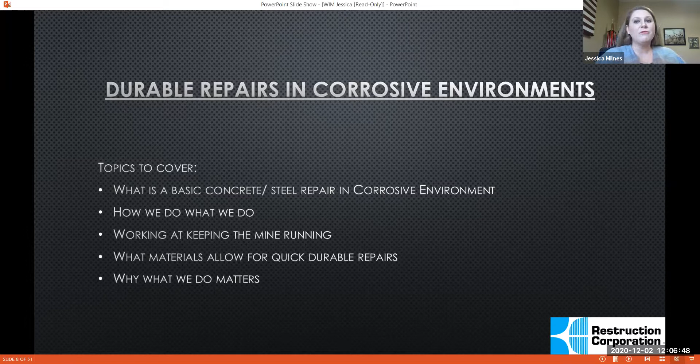So some of the topics that I'm going to cover today are what is a basic concrete repair or steel repair in a corrosive environment, how we do what we do, working at keeping a mine or another structure up and running while we are actually doing the work, and then what materials allow for these type of repairs, and then why what we do matters.

So let's look at a couple of projects that we've actually done. So this is a sulfuric acid tank house in Arizona. And what is happening here is the acid is leaking down from their SX/EW, from their processing. And it is corroding the coating, and then it got into the concrete. And once the acid gets into the concrete, it can get into the ground. So we want to protect not only the structure, but the ground and anything that's underneath it.

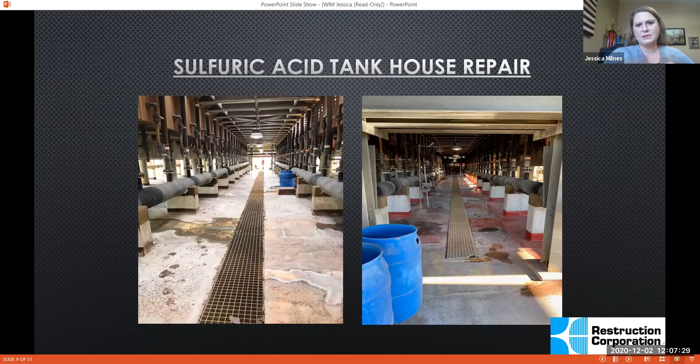So these are kind of some before and afters of our repair. So what you can see here is when this acid gets on the coating and there is any kind of failure in the coating, it gets underneath it and it causes this bubbling. So what's actually happening is the coating itself is coming apart from the concrete, but the concrete is also disintegrating. So it is falling apart.

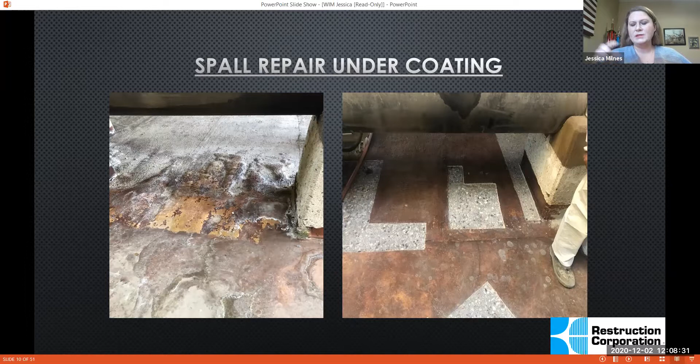So what we do is we go in and we remove the coating and we take out any of the bad concrete. And then we want to use really, really sharp edges, squares, anything like that. We don't just lob it. And the reason behind that is in a durable repair like this, we want to have good exposed sides so that the new material that we put in is going to bond well and have a cohesive coating at the end.

So the next step, after we've removed the coating and taken out any of the concrete that is delaminated or disintegrated in some way, shape, or form, we put down new concrete, and you can see the sharp edges. The goal here is not to remove and replace everything. The goal is to actually only remove and replace what is delaminated or what is no good. So that is why it's patchy as opposed to just removing the entire floor. And we'll kind of cover why we do some of that. Then we come back in with a coating over the top of it.

So a mention on this concrete is this is not the concrete that you see in a ready mix truck when you're cruising down the road. This concrete is very, very specific to this environment. The reason we use specific concretes in environments like this is, number one, the mine isn't going to shut down for us. They're not going to stop running so that we can go in there and take 28 days for standard ready mix to cure before we go in and coat it. So this specific concrete that is poured here is 98% sulfuric acid resistant. So it's not 100%, but it also has a really fast cure time.

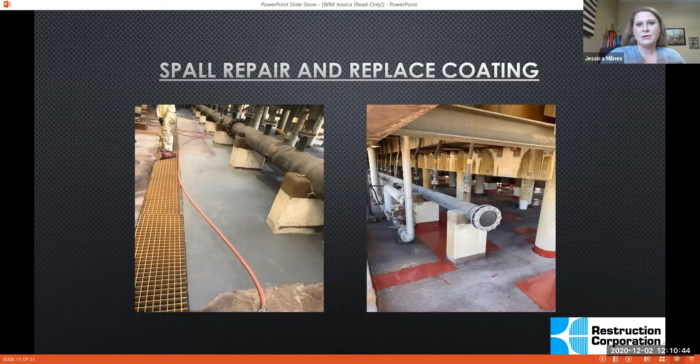So we're not sitting and waiting 28 plus days in order to go and cover over this concrete to protect it. It immediately begins to harden, it has a fast cure time, and we're able to go over it really quickly, protecting it even further. The other good part about a concrete like this, as opposed to using a ready mix in an environment like this, is if there is a failure in the coating, this concrete itself is sulfuric acid resistant, meaning it's going to help keep the acid from getting into the ground or into whatever substrate is underneath it.

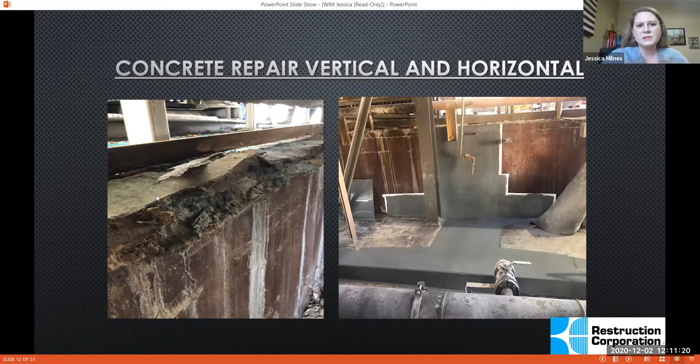Here's some good examples of what we geek out about, I guess is what you call it, is the delaminated concrete that is just literally crumbling and falling apart because of where the acid is getting into the concrete. And then you see this repair material is also a good repair material for vertical or overhead. So we are able to use the same concrete on the flat surface as we are on the vertical surfaces. So that is also something special about it.

Here's a beam. So the acid kind of drips down and it sits on this beam, and the machines are above it and they're being supported by that beam that is sitting on this column. So what is crazy is that you look at it and you think it's steel. It's not actually steel. That is fiberglass that they're using that isn't as susceptible to that corrosive environment. So we were able to just chip this out and replace it. And what you can see here is that it just goes back to what it originally was. It's not some new design. We are just removing and replacing what is bad.

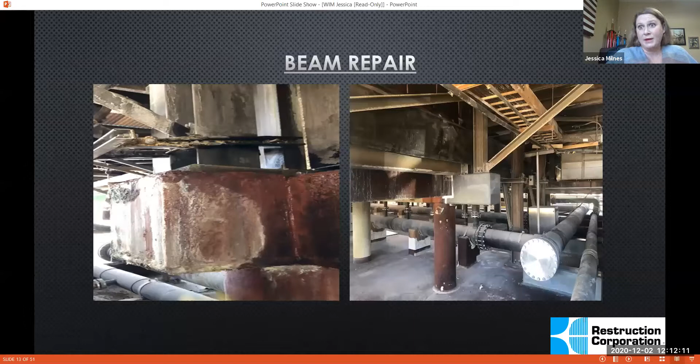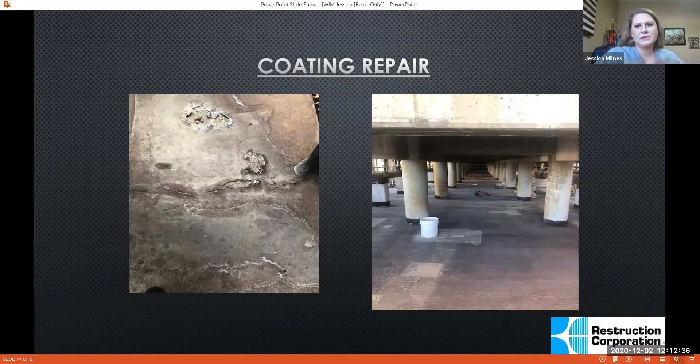So here's an up close of that coating. And what we're showing here is that sometimes if we catch it early enough, and we were able to widespread across here, catch a lot of it early enough where the concrete wasn't bad underneath, it's basically just removing the coating and replacing the coating. So that's kind of what we did there. And then here's a big overview of how you can see that we just removed the bad spots, and it's a mining environment, so no one actually really cares that much how beautiful it is when we're done.

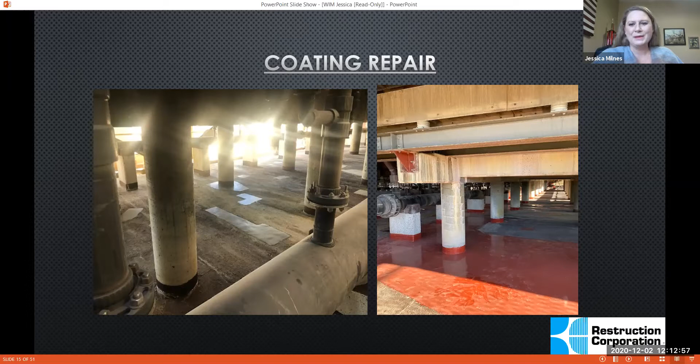But I still think the straight line stuff, they're pretty. So here's an example of some of those chemicals. If you have questions about them, or you want to know why we use what we use, or in what other environments, just get a hold of me and I can let you know what any of these repair materials are. So the Eucorepair is the one we were talking about.

That's the quick setting, low shrinkage. So I didn't even talk about why it's important. When you pour concrete originally, it shrinks. So when we go in and repair, we can't pour a concrete material that is going to shrink. Otherwise, it would be smaller than the patch itself. So we use specific materials that don't shrink in order to have it stay within the perimeters of where we've poured that repair back.

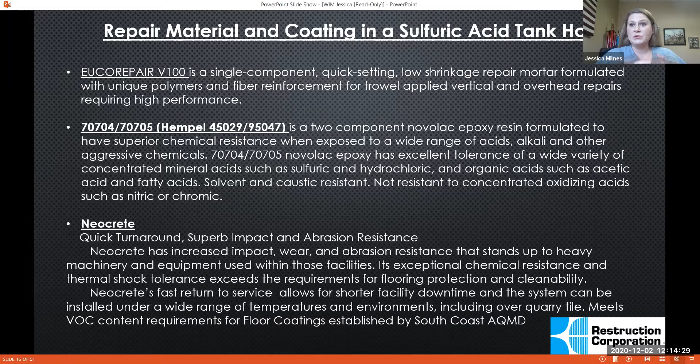Then we used a Hempel product. It's a 2-part component, a Novolac epoxy resin. And then we used a Neocrete, which has, and I took this off of them exactly, superb impact and abrasion resistance. That is important in high traffic environments or really rough environments like a mine, that we choose a coating and a material that will not only stand up to the acids and the corrosion, but will stand up to the abuse that it is actually going to take.

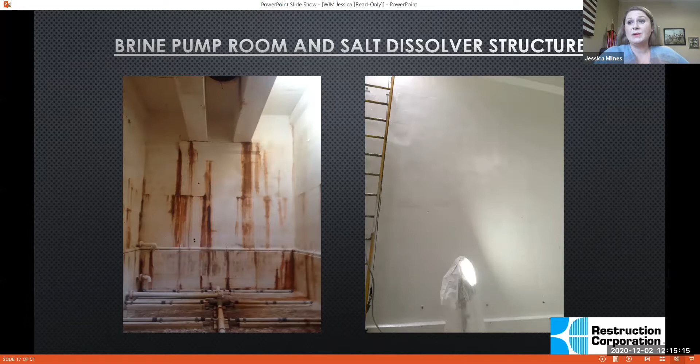Okay, so here's a completely different environment. This is actually a salt dissolving structure. It's a brine room, and you can't tell from these pictures, but we'll get to some other pictures where you see the sheer size of this room. You see the rust that's coming out here. When we originally went into the structure, we thought it was going to be removing the coating and fixing a little bit of the concrete, but the rust was coming from somewhere and it looks like it's dripping down. So it doesn't appear to be widespread corrosion. That isn't actually what happened.

When we got into the structure, what was actually happening is rebar can expand something like 10 times its original size. When the water and the salt hit, the rebar begins to corrode and expand. As the rebar expands, it pops the concrete off. For a repair like this, we have to remove all of the bad concrete that's already popped off, because it's not going to stay on there later. You can't just coat over that. We also have to chip back until we find good rebar, rebar in its original state and original size. Then we go a few inches past that before we begin our repairs.

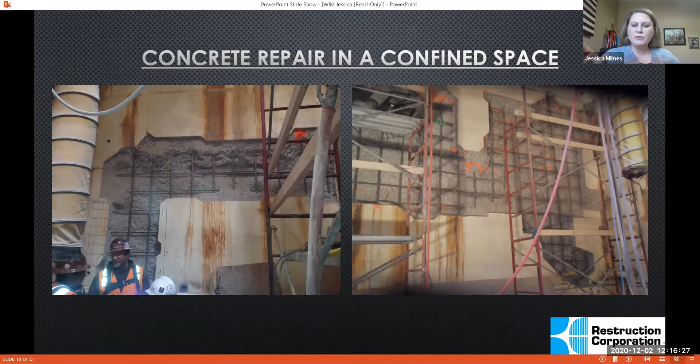Well, you can't always just clean off rebar. There is rebar that can be cleaned off if it's not gotten to that point. But in this case, the rebar was so corroded that we had to remove the rebar and replace it. We do that one of two ways. Something special about a contractor like Restruction is we have welders that work for us, and our welders have specific certifications to weld rebar, which is not your standard flat or upwards. It's a specific certification. The other thing we use is couplers. Those will tie together the rebar as well.

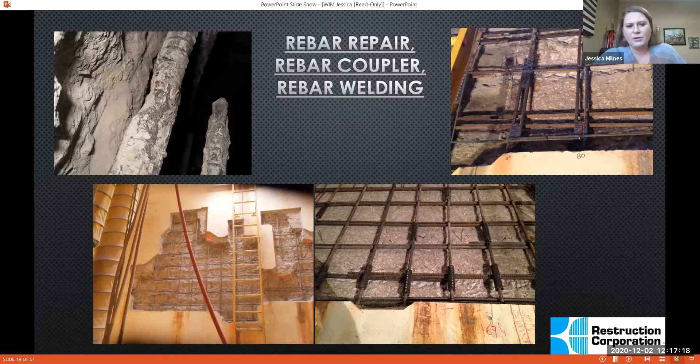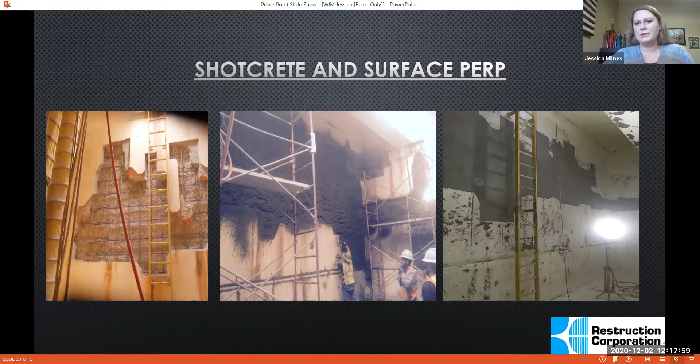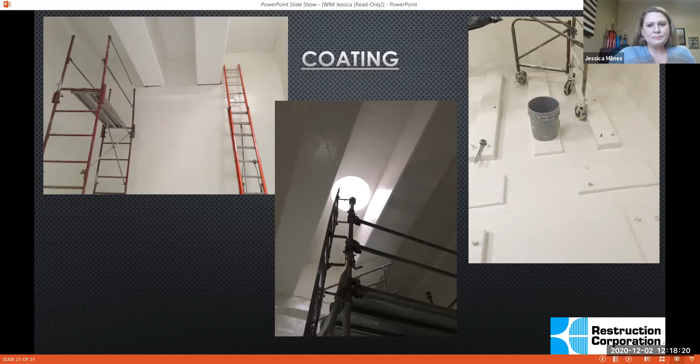We square it up. We make sure that there is a good bond between the new repair material and what was originally there. And you can see that they're actually down in this hole. And then the last step is to choose a coating again that is going to withstand whatever the actual environment is. So these are kind of some information on the coatings.

What is noted that's different about this coating that could carry over into a mine or someplace like that is this coating was intended to be submerged underwater. So it is a marine type coating, but it also has the formula to withstand the salts and the different things that are going to be in the water that is in this structure. And then like I mentioned, the Sikacrete 211 SCC, that's a polymer modified and silica fume enhanced repair material. And yes, that's the same silica that we hear about with MSHA all the time.

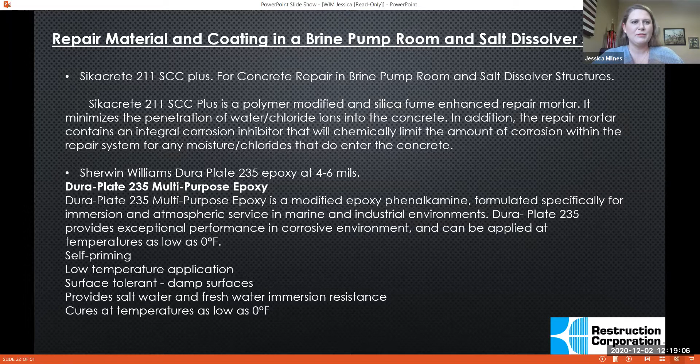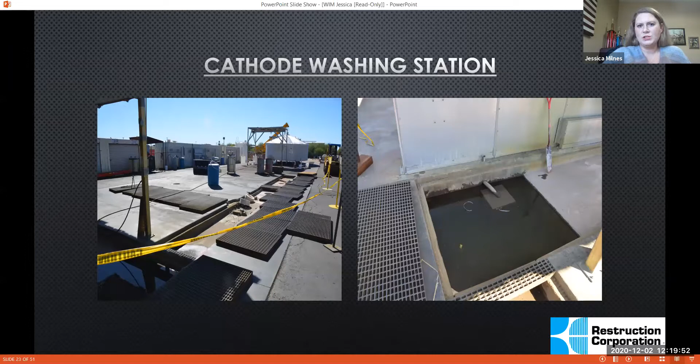Okay, so the third project I wanted to share with you, this one's down in Tucson. So it's not actually a mine, but what they do is when the cathodes at the mine are having an issue, they remove them and they either repair them or they replace them. So what they're actually doing at this facility is they're washing those cathodes. So the same acid is getting into their structure, which isn't necessarily on a mine site. So what happens is when they wash them over time, all of the coating has been just worn away in this trench drain that is right here. So this is kind of the before.

So what we have to do in an environment like this is we go in and we remove whatever coating is left, and then we actually hand grind this, whereas the other projects we use things like jackhammers and so on to get a surface prep that we are looking for. So this actually is hand ground, so it's a really low profile. And then we take the same material that we're going to coat it with and we thicken that up with fumed silica and we fill in the cracks. So if you see on this picture on the left, you see the big cracks. That is where this acid is getting into their structure and then into the ground.

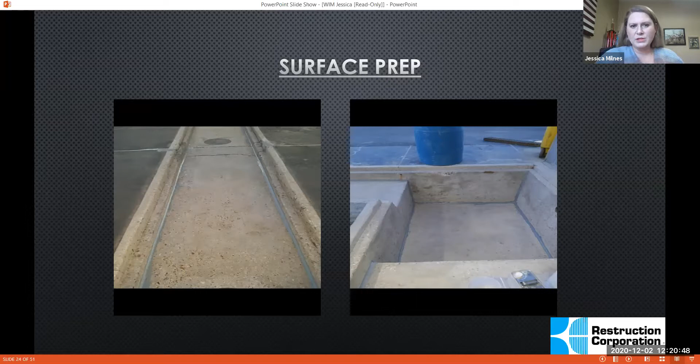So what we're trying to prevent is not necessarily just the delamination of the structure. We're trying to stop that acid from getting into the ground. So what you see here is it looks wet. So this is the primer. So the primer we used on this one was actually clear, but you can see really well that we chase those cracks. So we rout out the crack in order to give us something to bond to.

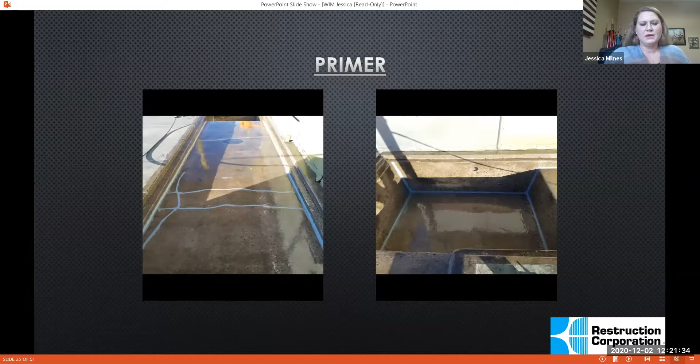And what we also want to do is get to good concrete that doesn't have acid in it, because we don't want the acid coming up through the concrete. Otherwise, it's going to bubble our materials or repair materials. We don't want the acid going down. So we have to get this to the point where there isn't acid left in the concrete. So we fill in the cracks and prime it. And then this is the coating.

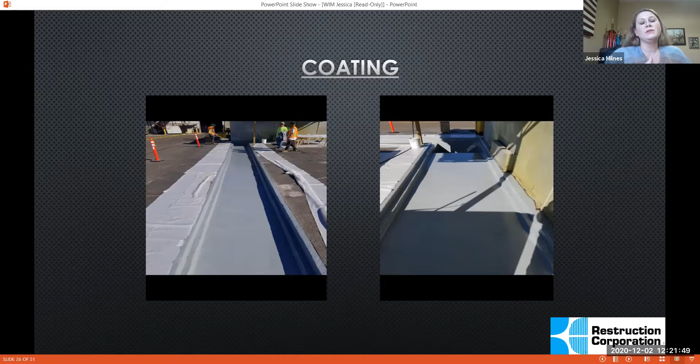So again, like I said, our goal at Restruction is we don't build things new. We don't just remove and replace. Our goal is whatever we do to return the structure back to its intended design. So they put the grates back on and it looks as if we've never even been there. So a couple of the materials are the same, but the guys in our office asked me to mention this MasterEmaco T 1061. This is a rapid setting cement-based concrete repair material with an extended working time.

So what is actually happening here is this facility could have allowed us the time to use something like the 28-day cure. But money and time management wise, it makes more sense while we're there to use a repair material that allows us to finish the job while we're there, as opposed to leaving and coming back. It costs more money and time and mobs and all of those things. So we take into consideration, if it was a long job where we're going to be there 30+ days, we would have used a cheaper material. But we were just repairing this one trench, needing to coat over it and move on to the next jobs that we had lined up.

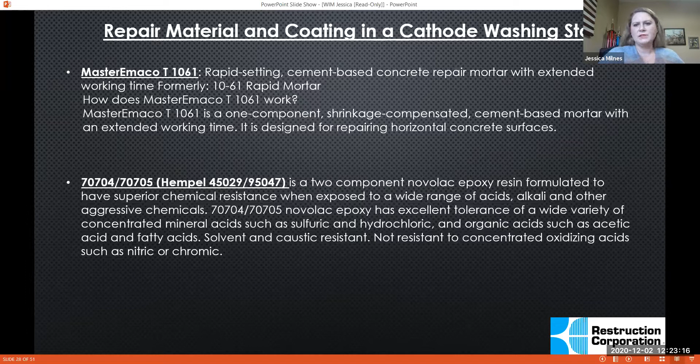So the Hempel product is the same that we used at the other mine because it is that acid resistant, and what they're washing in there is sulfuric acid. So a couple of the repair methods that we do at Restruction.

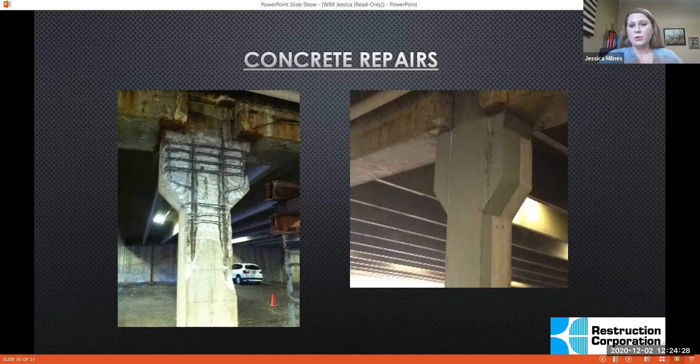So what is a concrete repair? A concrete repair should look like this. So this is a great example of where that rebar has corroded. It has popped off that concrete. We've gone in, we've repaired it, and we pour back the concrete to look like the structure originally looked, and it will hold the weight that it was originally intended to hold.

We specialize in doing overhead concrete repairs. If you don't know what we do, you wouldn't necessarily look around and think, okay, how are they going to fix the concrete that's over our head. So when you're walking through a parking garage or someplace like that, and you see concrete that's falling down overhead, it actually takes very special or unique techniques in order to repair concrete that is over your head. So we do pumping, and sometimes we can drill pilot holes and pump down, but build special forms, because again, the goal is just repairing the structure.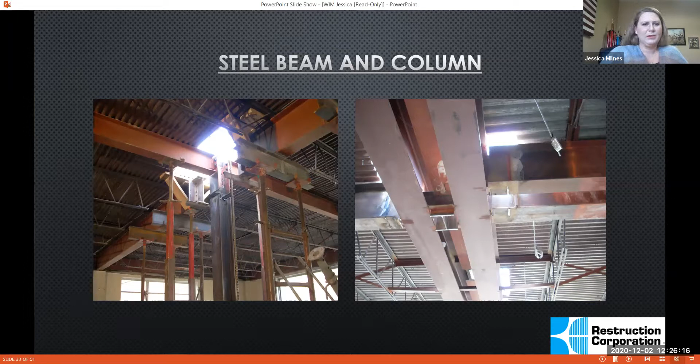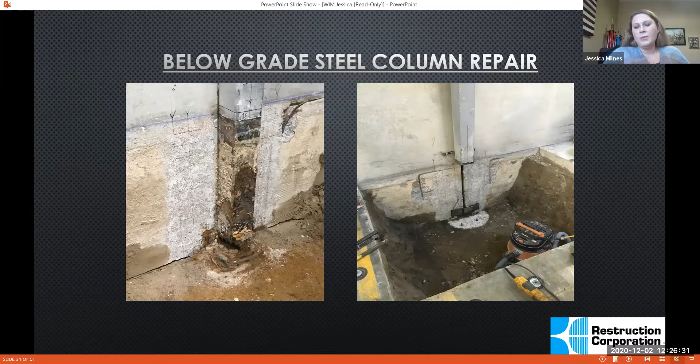This is something you'll see quite a bit. So the original design, the concrete or the steel column is actually below grade. The water gets to it, it begins to corrode, and it compromises the structure and the strength. So what Restruction did is, we weren't able in this specific structure to just remove it and replace it. So the other thing is the material that's being used here is very expensive, but it's a really, really high PSI concrete. So what we did is we shored it up so that the building wouldn't come down, because now we've lost the strength here.

And we came over, we removed the ground and the concrete. We just cut off that column. We welded a foot onto it and then set it onto that high strength concrete, filled it back in, poured it back, and the building was able to continue operating like it was originally designed to operate.

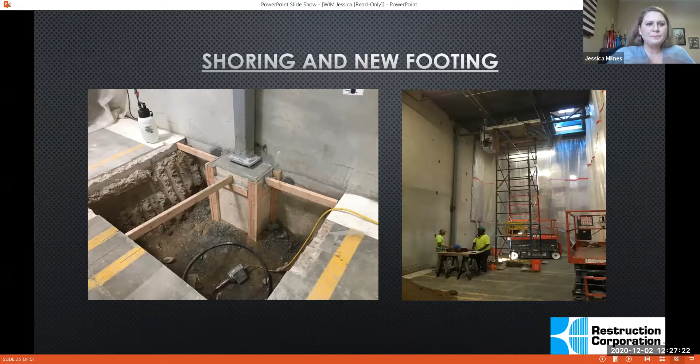So this was another one. This one, the building was well underbuilt for the location it was in. So what the engineers designed, instead of changing the structure, what we actually did was we found where the columns are. We went in, we put this steel plate against the foundation, and then we welded the column to that steel plate, filled it all back in. They were able to just close the drywall back up, and no one even knew that we were there, but we were able to add the strength to the building this way without actually having to add more steel to the walls or bulk.

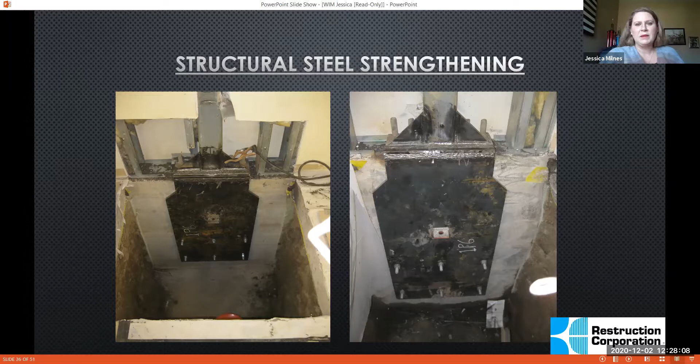So this is one of our favorites to talk about, because if you go to the Phoenix airport and you go down the T3 terminal and you see these big, beautiful white columns, these are those. What actually happened was there was a floor running in the center of these columns, and they wanted to remove the floor and expose it. So they also don't want to add bulk or mass to these columns. So what we did was we repaired the columns and then we strengthened them with carbon fiber.

So carbon fiber is really good, not only in an application like this, but in other applications where you have a building that has one design intention, and then you want that building to be used for something else. So the manufacturers of carbon fiber in the classes that I took told me the best way of describing fiber is that it's like exterior rebar. It doesn't add the mass or the bulk, but it adds the strength.

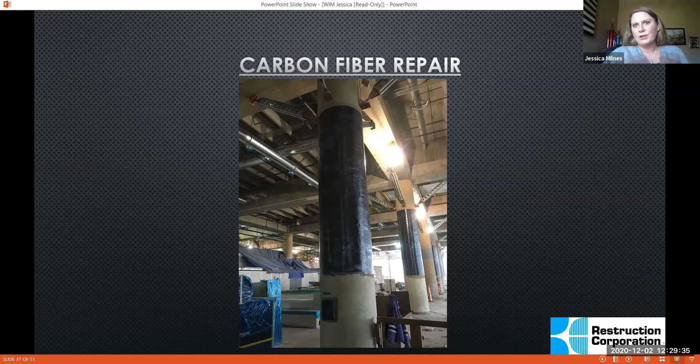So we strengthen these columns so that the roof isn't coming down on everyone when they walk by. And then we fireproof them. And right now, when you see them, you see these big, beautiful white columns, and you would never know the amount of work that actually went in behind the scenes.

So this was on a mine where this culvert or pipe that ran under the ground wasn't designed for the amount of earth that was then piled on top of it. So that happens a lot in the mine, right? They begin digging one place and then they kind of adjust and move, and what's underneath it isn't always built to withstand what is now being put on top of it.

So we are able to use carbon fiber in this structure as well to strengthen it up. We just built a special slide that kept the guys from actually touching the fiber, and did carbon fiber to strengthen the inside of this tunnel. This can be used in tunnels that are delaminating, they have other water issues and so on, and maybe you've done the repair, but you need the additional strength.

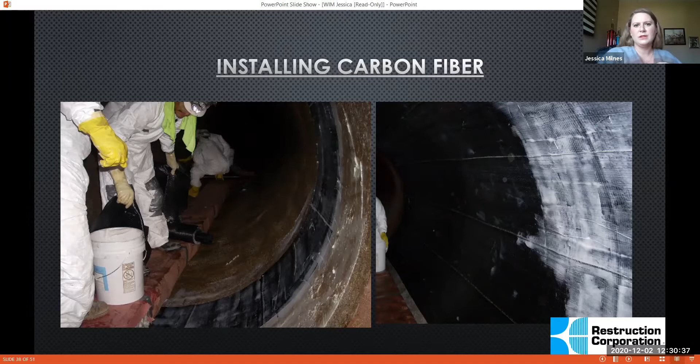So this is one of our favorite stories. The old jail in downtown Phoenix is now the offices of the district attorneys. So they decided to take over the jail. So this whole building had to be remodeled. And because it wasn't originally designed to hold the weight of air conditioners and other things that are being put on top of this structure, we went in and added carbon fiber in this slab strengthening, basically, in order to shore this up so that they could use things like air conditioners and whatnot on top of this roof structure.

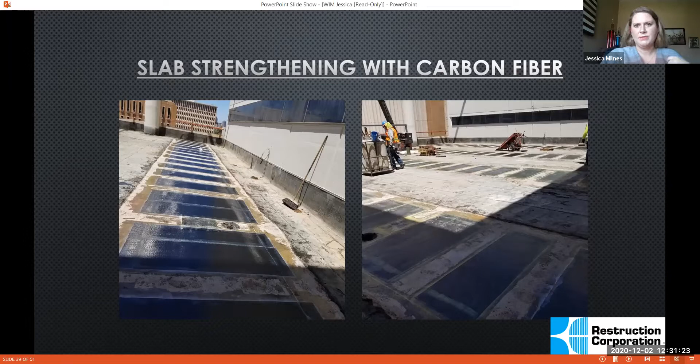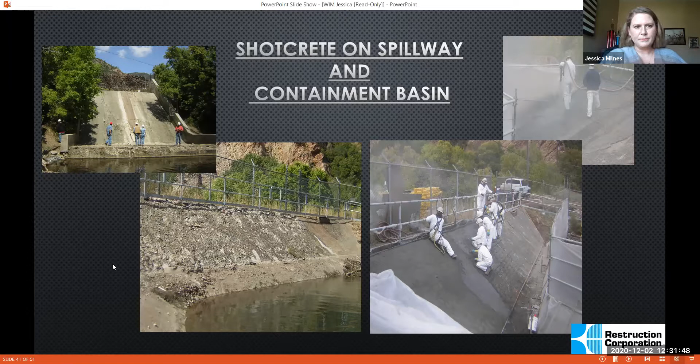So shotcrete is used a lot in those environments. This is a dam. So you might see a lot of this. So this is not on a mine, but you'll see spillways like this or containment basins. So we use shotcrete and repair materials in order to kind of take care of all of that.

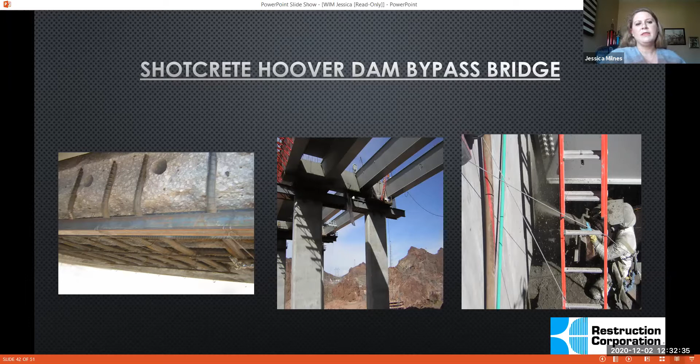And this is actually the Hoover Dam bypass. How many of you know that it caught on fire before it was ever built? And they had to hire a contractor to go in and repair what was fire damaged. And we're actually that contractor. So they had a fire from some welding. And because the river runs underneath it, it was enclosed. So the fire itself damaged the concrete. So you see these holes here. We did some core holes. We took all of the bad or compromised concrete out, and then we poured to make sure that it was good. And then we repaired this with shotcrete.

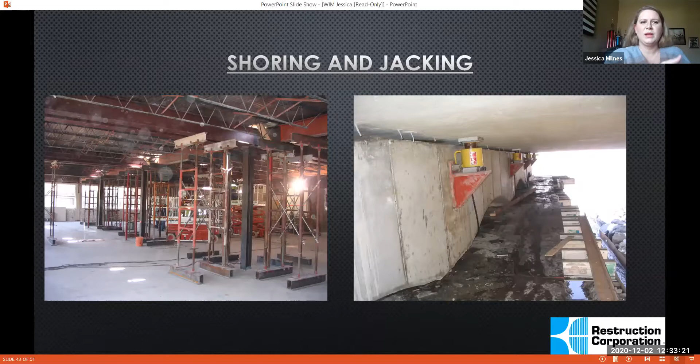So this is something that's really important to keeping a mine up and running, is actually shoring and jacking, believe it or not. We are able to shore up the buildings, and we spend time and attention making sure that when we're doing these repairs, our goal is to keep the mine running and operating as best as possible while we do our repairs. Obviously, there's areas in the mine that can't operate while we're working in them, but there's a lot of areas that can, and we do a lot of that through shoring and jacking. So this is that same building that I was telling you about, and you can see it all the way across. We removed all of those steel columns.

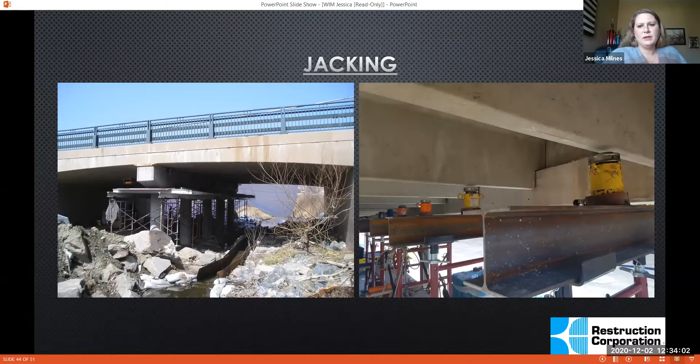We're getting towards our end. This is one of our last ones. What actually happened here was a bridge was under designed, or it wasn't operating the way that it was designed to operate. So this center didn't actually exist. So what we did is we went in and we used these locking jacks to engage the bridge where we want it to be. We built this center and poured it out. And then when we let those jacks down, the bridge is able to come down to the level that it needs to be at.

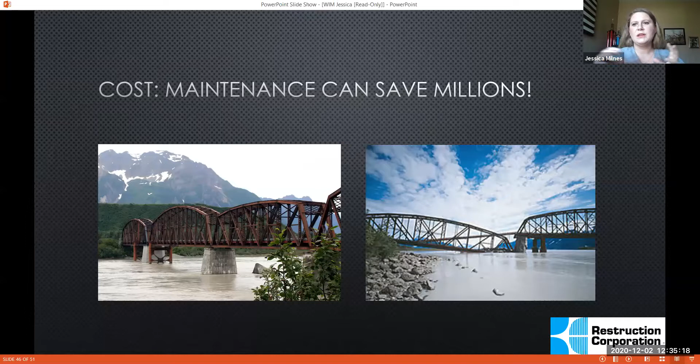Well, they didn't do the maintenance on it, and an earthquake hit and part of it fell. So I use this as an example of the cost to repair this bridge, which has to be repaired because the coatings that are on it would pollute the water. It disturbs the salmon run. So the cost is so much greater in the end by not doing the repairs than it is on the front end by actually doing repairs.

So shutdowns and access. By doing regular maintenance and repairs with companies like ours, what mines are able to do is limit their amounts of shutdowns. And then durability and service life. So a company like ours coming in and just doing these regular repairs and maintenance items extends the life of the mine. You don't want to allow a structure to deteriorate to the point that you realize there's 5 years left on the mine life, except your SX is falling off.

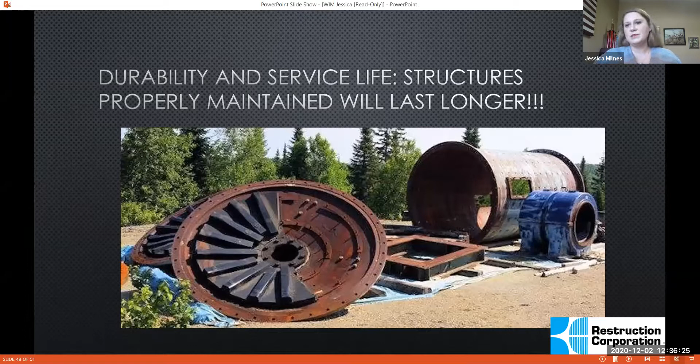So we are able to go in there, and that is part of why what we do is important: we extend the durability, because oftentimes the repair materials and the repairs we do are stronger than the original structure was, and then we just extend the service life.

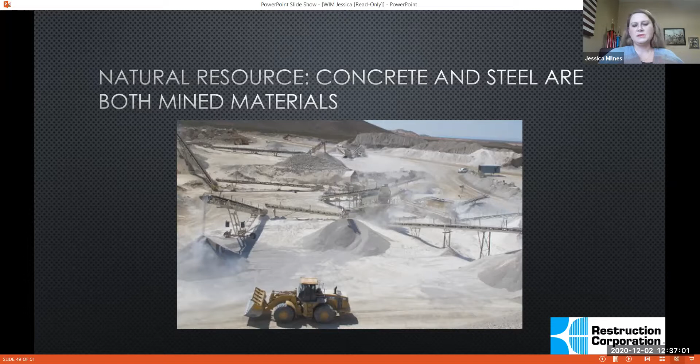So something I am passionate about and why I do what I do is actually natural resources. When we do repairs, as opposed to remove and replace or tear down, we actually save on natural resources. The amount of concrete that we use for those repairs you saw is minuscule in comparison to the amount of original concrete that was used to build those structures. If we're constantly tearing everything down, it has nowhere to go, but using repair instead uses less resource. And that is why it's personal to me.

My husband and I, our favorite thing to do is go fishing in Alaska. So I am passionate about repairs, so that with bridges like the one that fell, they did repair that and they did pick it back up out of the water, which is keeping the lakes and the rivers and everything safe for all of us. So that is it. Do you have any questions?

It looks like we had one question, Jessica, while you were talking, from Daniel Stringham: does Restruction Corporation do mine shaft stabilization? Yes, we do. So if you have a mine shaft or something like that that you are concerned about and you would like someone to come out and look at it and have a conversation with you, by all means, reach out to me and we can have someone look at it.